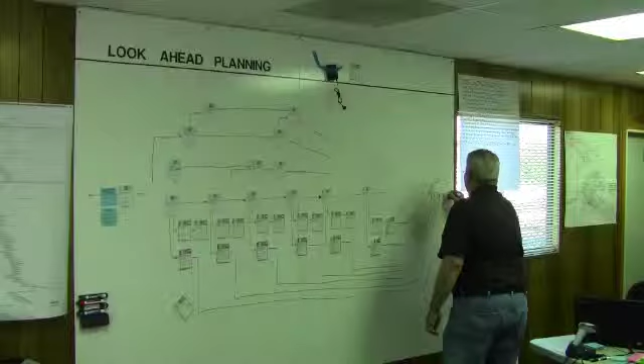That's something I was curious about, wanted to talk to you about. When you're putting this together, what Rick was talking about is, I look at it and immediately what I see is the forward pass, backward pass wheel. But are the links right, and what we play with in P6 and other schedules? Are you doing a simplified version without thinking about it, or are you truly a schedule guru who thought about the relationships, predecessors, successors, and all that? I am not scheduling people, I'm not, and I don't want to be.

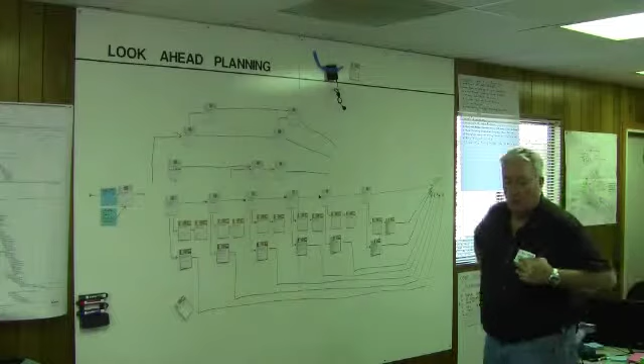I'm not saying it's a negative thing, but I'm trying to understand - are we speaking two different languages when we start to implement it, input it into P6? Are we doing a different step? Now we've got a translation issue between the two of us. That's why the word pickup was new vocabulary for me.

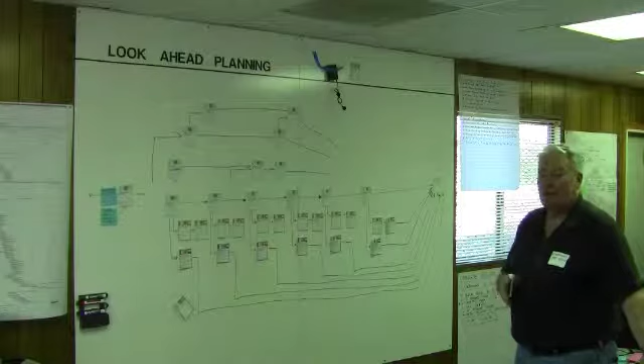Now that I understand it, I relate that to rattling steel. You rattle steel and put a couple of bolts in, but you don't finish - get the steel up, rattle a couple of bolts, then come back and true and finish. So rattling steel and pickup, same thing to me. But I would never come in here and say let's use rattling instead of pickup. That's my language, not your language. So I have to listen for what your language is and put your language in here, as opposed to mine.

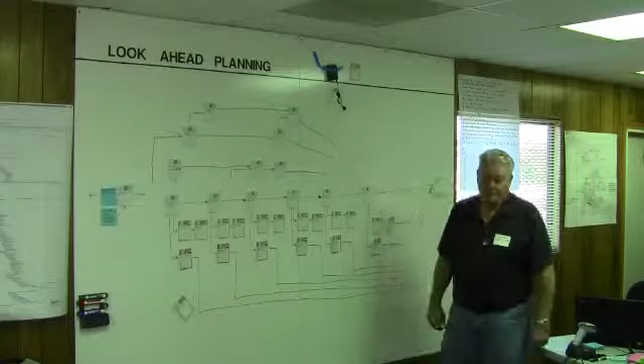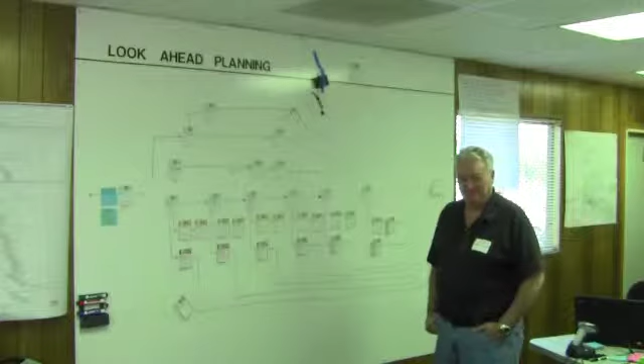They built 7 buildings, they're out there. How are you still changing work, what are you still figuring out? Well, this is panelization with the new manufacturer. If that's going to happen, then that's the critical path, and these guys have to figure out what they're receiving. There's holes being punched and cut out there that probably shouldn't have to be - that should have been done in the factory.

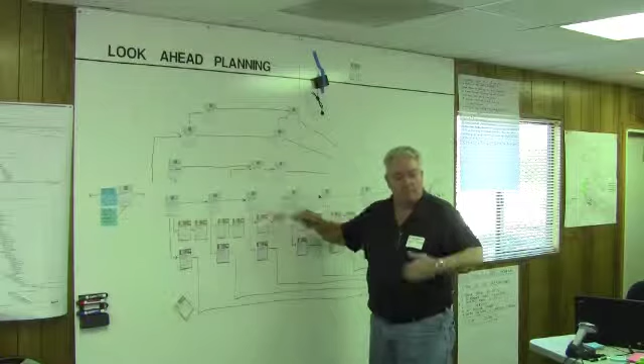They don't know these people yet, so they have to do things to make it work, because they're not getting what they expected. Not that they're getting something different from what was committed to, but we do a BIM model for a reason - to find out where the interferences are. Shouldn't those holes be pre-cut? That's the thing, but they're not.

I walked out, got lots of pictures. Did you put my notations on? What jumps out, give me two things. Number one, safety - those strips of metal, screws sticking straight up. If I'd stepped on one of those, bad news - they were all over the place out there. That's number one. Number two, I saw all of the handmade cuts with something - it looked just crap.

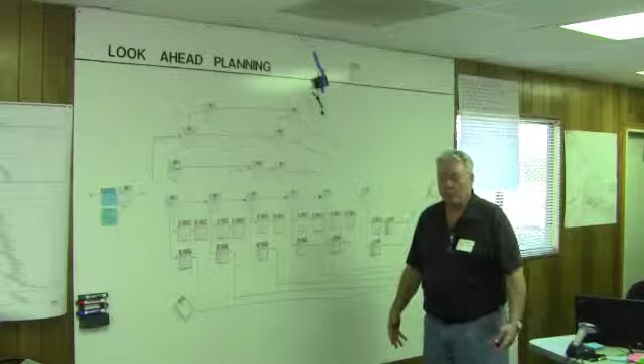I mean, again, that's what BIM is for. Yep, that's what BIM is for.

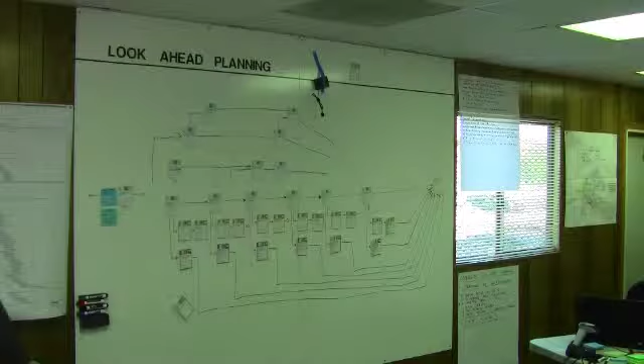Give me like a 3-word capture for this KPFF structural division. What's his problem? What is KPFF doing for us? What he did is on the back of house. Real simple, I'm just going to go like this.

Here, okay, we're building this one. I got a little walkway here, and I got an outbuilding. He gave us this one, and he did that. He's working his way up like this, and then all of a sudden he goes, here, I need all this done, approved, right? Approved before I can give you this. So all I can do is go vertical, I'm stopped, because I can't make my walkway and connect the two. You see what I mean? Yeah, come across.

So I've got rooms, I've got trusses, I have no back of house. Some of that, just in the overall BIM process, pre-planning - a lot of work goes in, I'm not making an excuse for it, I just know a lot of work goes into them. But if I've got a slab and you want guest rooms and you put something in here in production, go.

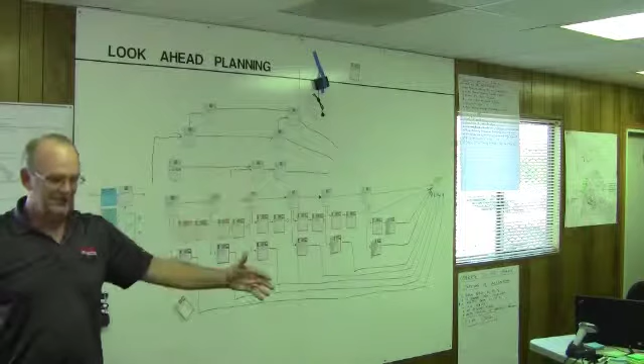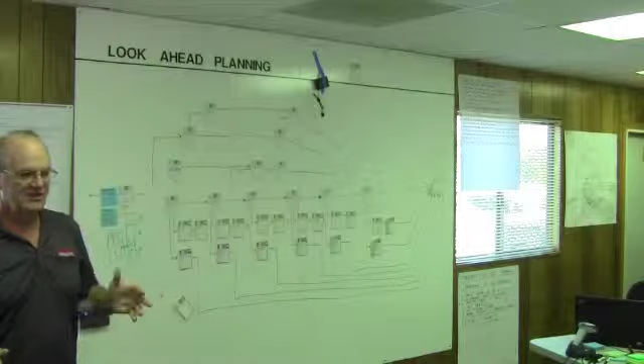First floor. A little more on materials, we've learned in our lessons, we need, because of the assembly of it, a period of time where there's a lot of work, a lot of production that can be done prior to assembly. That's a lesson learned.

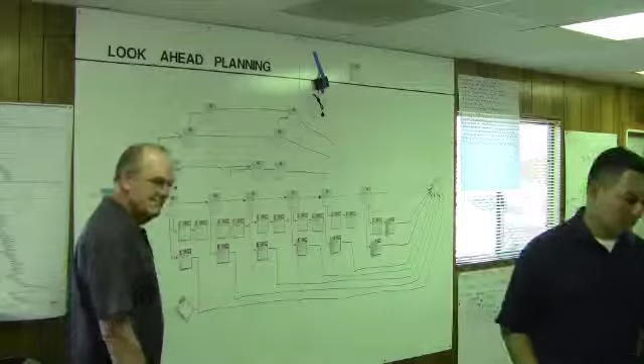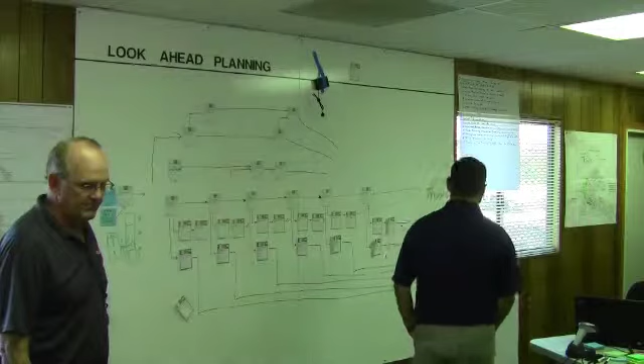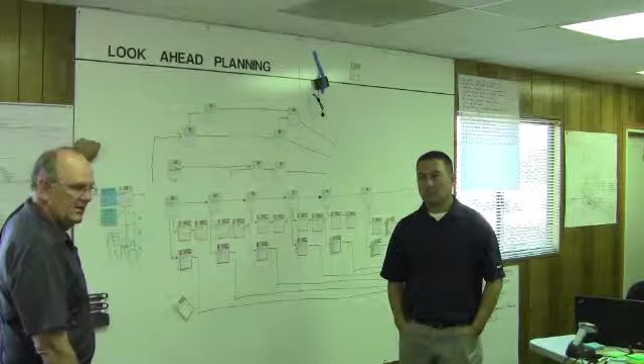Give me like a three-word summary, I want to have a conversation with them on it. They have a legend issue, and now is it sequencing? Right now it's like submittal sequencing. We need the submittal approval on back of house. But does that mean we need to give him a sequence in the future so he can work to, or is he late on something? If I have a conversation with him and want to bang something over his head, the legend issue is something I've got. How can we better avoid this going forward? Is there a lesson learned for me to share with him, or is it?

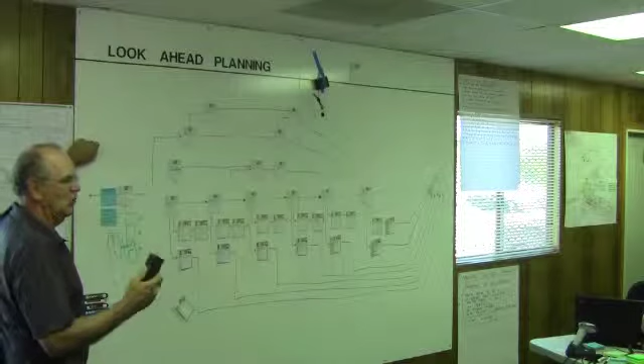What Kevin feels is to stop. He's got his consultant KPFF, and he's saying, okay, if I could help with KPFF, I just need to know what that is, and if we can stop it in the future. What it is, he needs BIM drawings to approve. Jonathan's here. Jonathan never—and I'm out of that circle, other than Jonathan. Jonathan's right here, he's in the circle with BIM drawings.

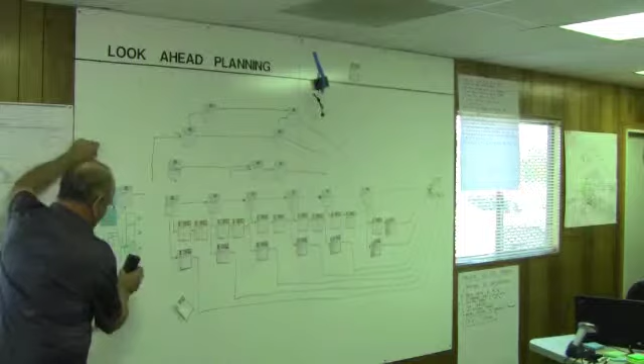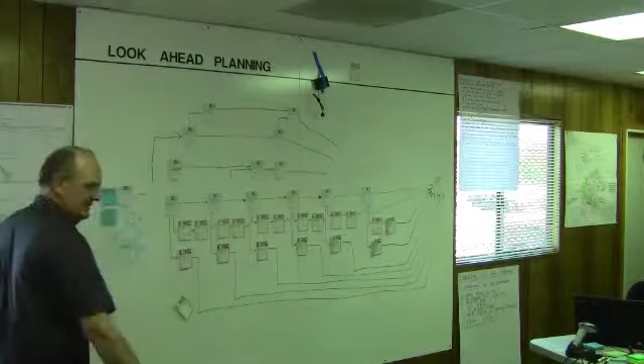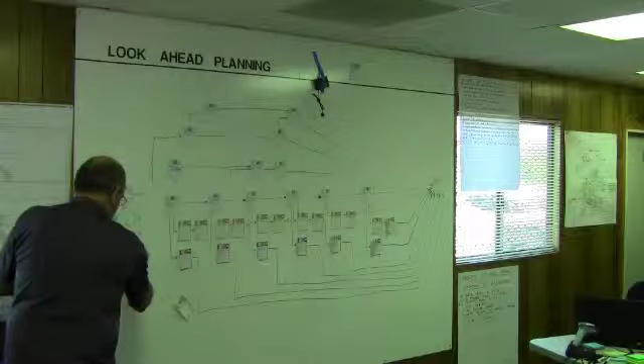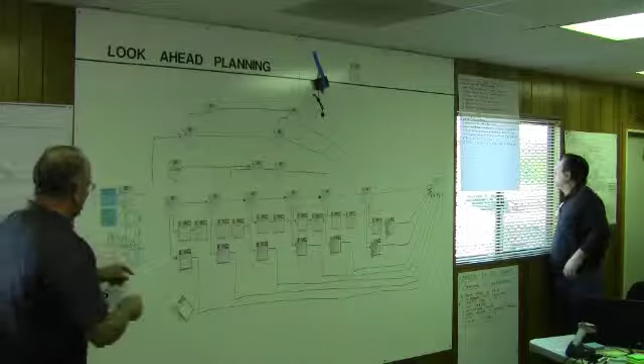We were told from in the room here that first floor, level 1, was level 1. Okay? Now KPFF is saying today, no, level 1, I can't have that until you give me this. That's the clincher—you give them all 3 floors to do this, you stop BIM here.

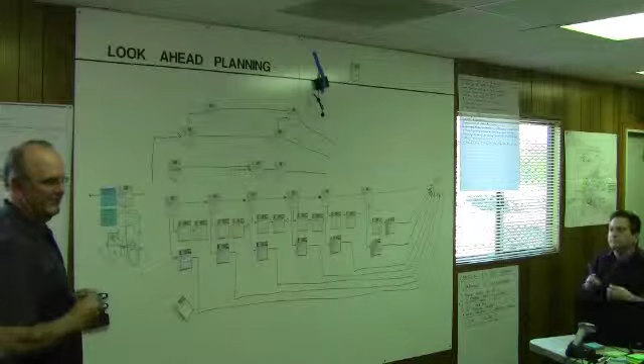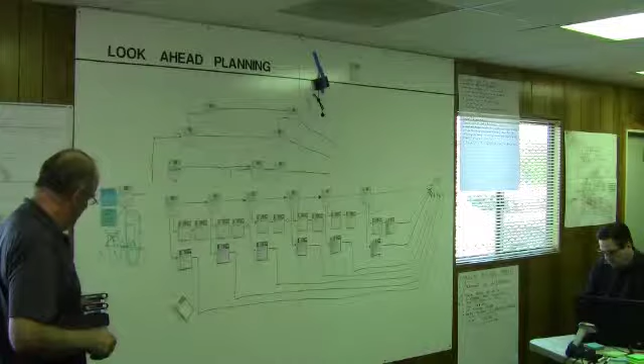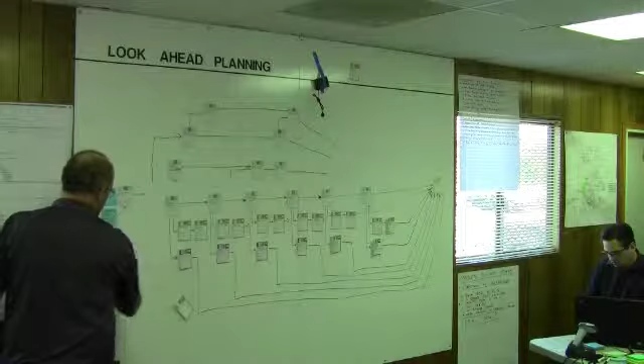But for me, well, what I want to do is just, if there's—they want to look at the submittal all at one time. They want to see all the connection details. That's the reason why, for whatever reason, necessarily all the connection. I'm sure she's got a reason why. But I think if we just talk to her and say, look, production-wise that doesn't work, so can you look at this so we can adjust.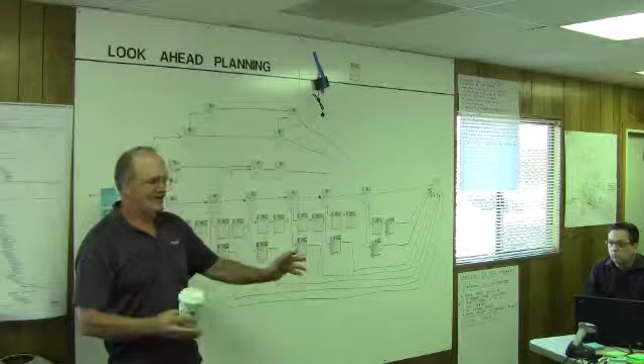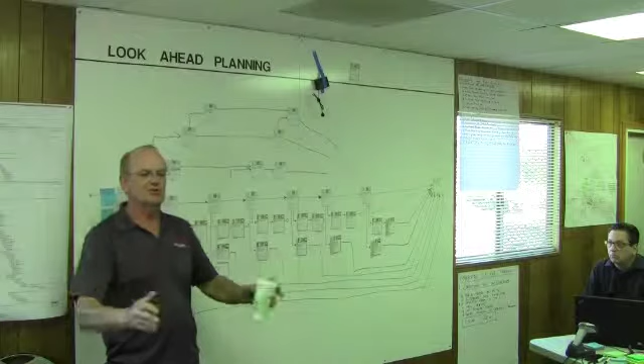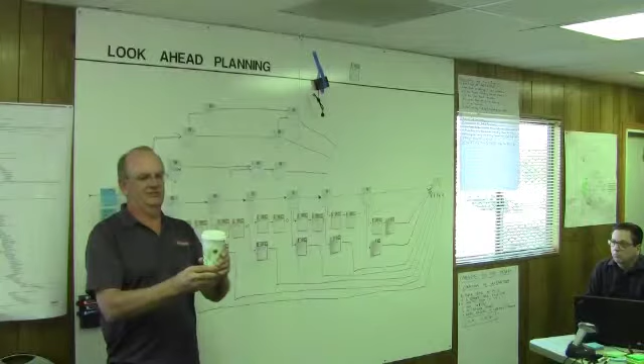Just throwing this out, let me offer this, okay? When they're doing the pre-planning, it kind of hit me when they were talking to the lean team, because Dave was out here with them, involved as an architect in the lean program, pre-planning prior to construction, where a lot of it is done up front. It may be that KPFF—and I don't want to make any new rules up—but in pre-planning it's, okay, if I want to build this building structural, how do I need to receive my submittals, to be the most efficient for that field? Can they give me all of level 1, 2, 3? No, we have limitations on how that can be approved moving forward.

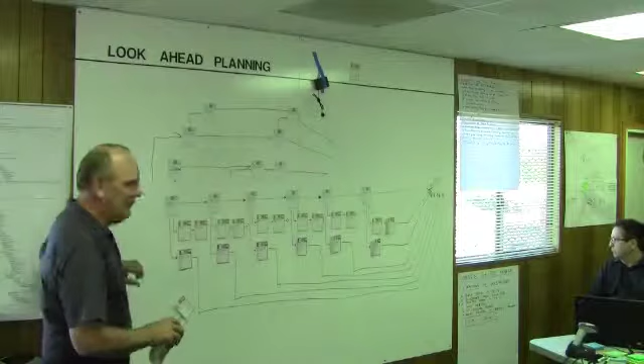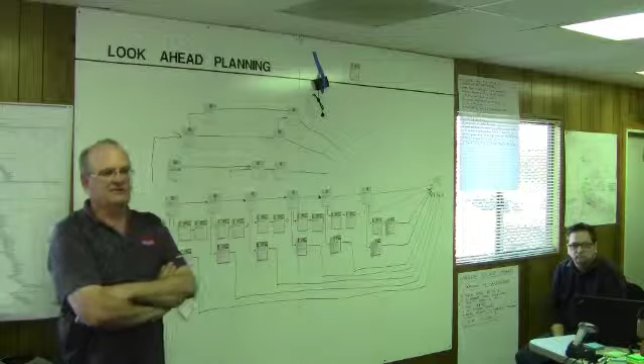Maybe it's—so it's a pre-planned thing that could have been eliminated, but now we just have to figure out how to move forward. Now we gotta get that. So what I'm calling is submittal sequencing. We probably need to have a conversation about what do you need? Just like we had talked about, give me a submittal schedule so we can get a heads up, or basically MDR get a heads up on what. This constructability—they have their means and methods they have to go through their submittal check process. I'm not the expert, they are. I mean, they can pull that out of the weeds.

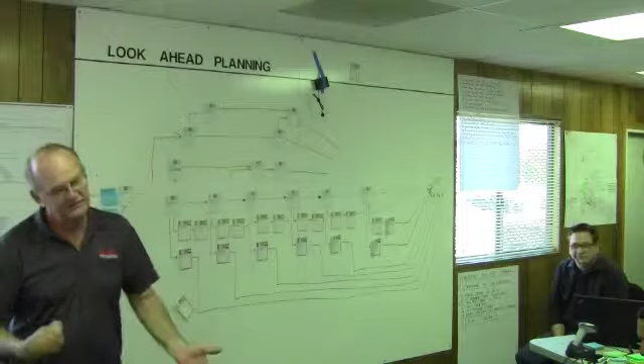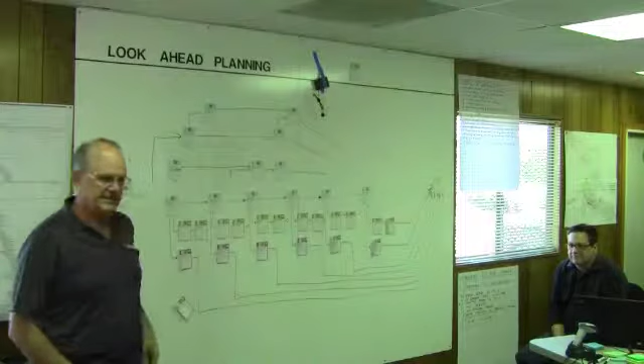Well, I mean, because obviously we got the signing. I just don't want design or anything to hold us up.

I don't think so, it's probably a conversation with them, there's a method to the madness. She said the stairwells can't be reviewed in floors, so it would be a system, but she didn't know until she got done reviewing the first floor. That's when I got on the phone with her and she brought it to my attention.

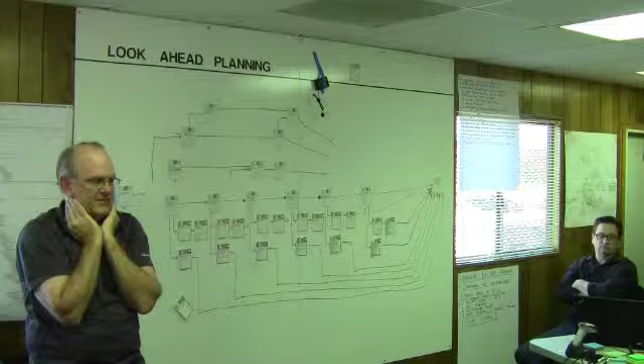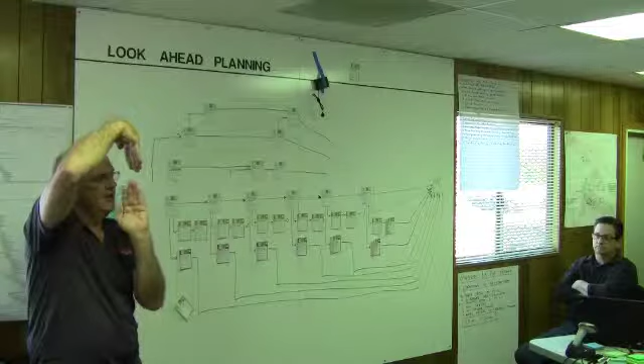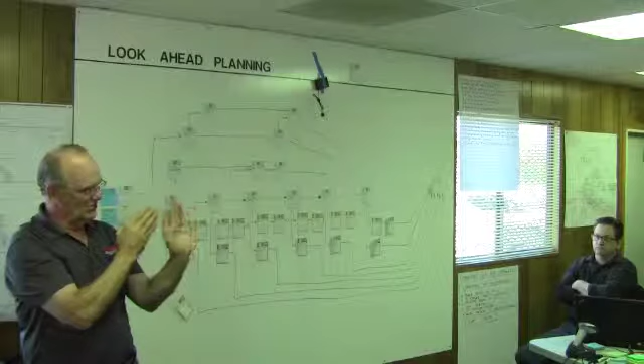She might be in-house trying to figure something out, but like John said, you just gotta weed through there and ask her what it is. Does it stop all the way, does it stop my center core, does it stop, is it one connection holding up?

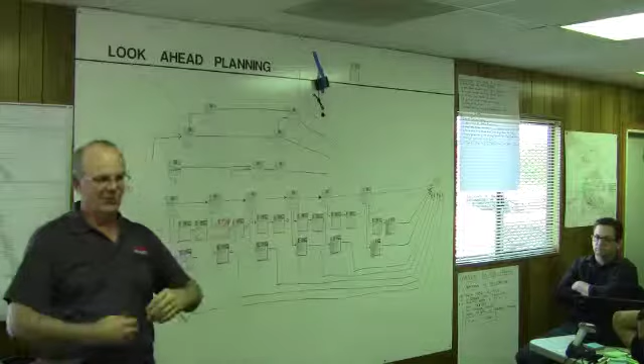We don't know, we're speculating. All right, that sounds like a good conversation.

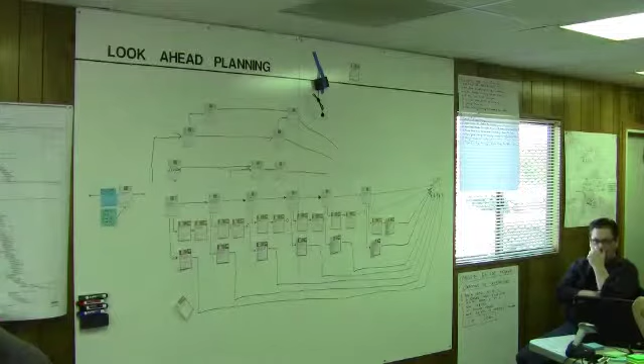I kind of gave it this format there, just in a nutshell, what we did.

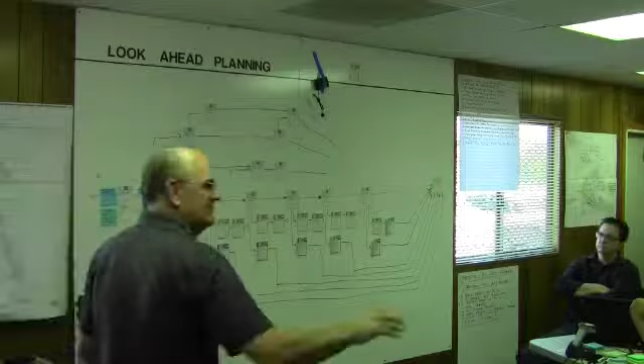We took our information from here, we brought Rockdale in, sat his butt down, and he was all ears. Did the best I could to explain to him what we had going on, so he's had a first lesson.

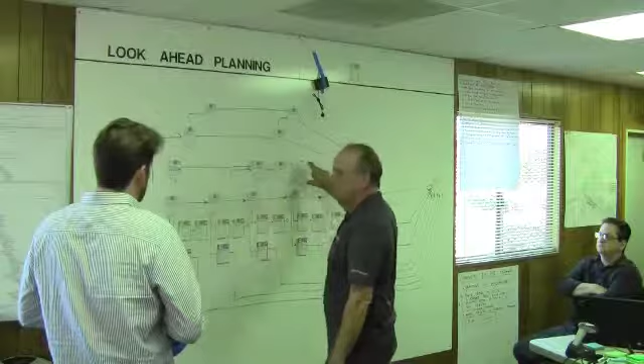We need to be able to put the information into the next note for the second floor. We got him in here, we gave him this critical path, we gave him the layout and the input of the joist up here. The back of house issues, we need to work through this right now.

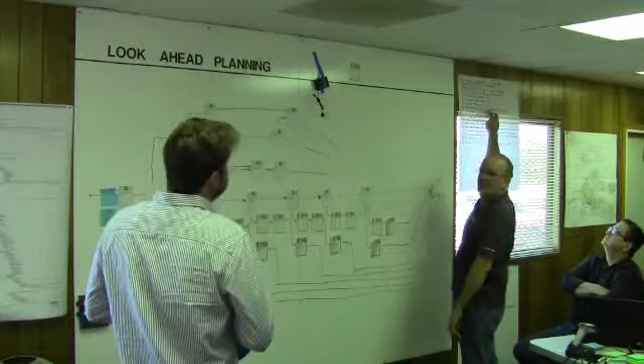And then the metal decking, the corridors. I gave him complete second floor framing, my conditions of approval. This is spelled out of what I see done as 100%. We had a conversation, the first day was first floor, level 1, I need to have done.

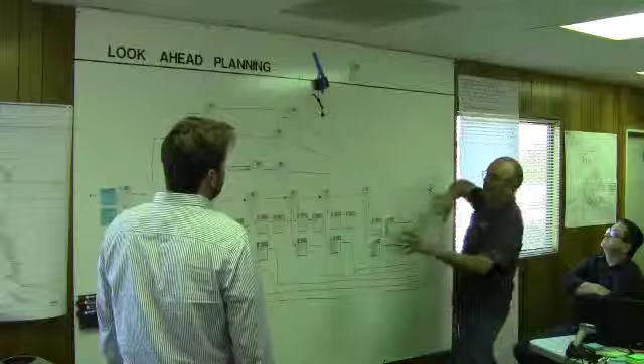That includes outbuildings and guest rooms, all of one, because we can't go anywhere without it. This is broken down a little bit further to include those outbuildings. Anyways, for you moving forward, I don't have durations.

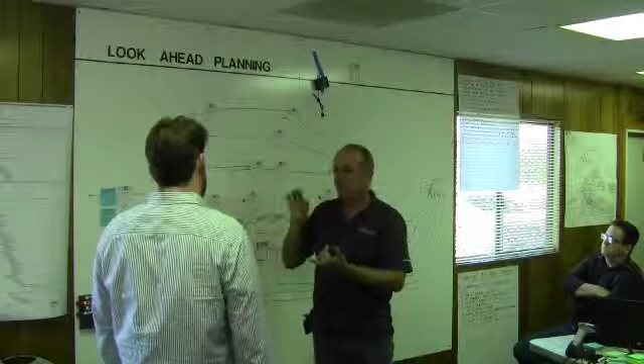For the sticky notes that you need to put in, these are in there already. We reinstalled them, we changed the dates. There might be additional ones you need to add, let me know. But we need durations and procurement. We don't know when the delivery dates are.

We're finding we need 5, 6 rooms out front before we need those men here to do it. We don't have a second floor delivery or back house delivery. And that's the Reader's Digest version.

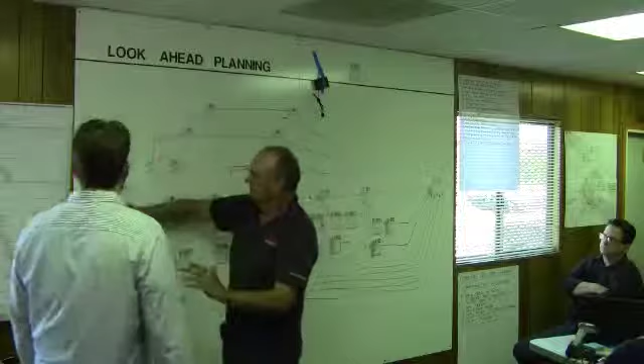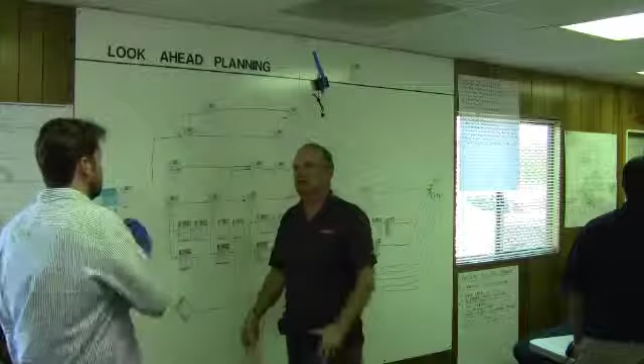So right here, your input this morning, we started here, left walls, rescheduled, but it has no dates to put on. It's all based off of SWS's input of procurement, being able to deliver in production, and in tune with that would be manpower. That gives us a number of days to install that.

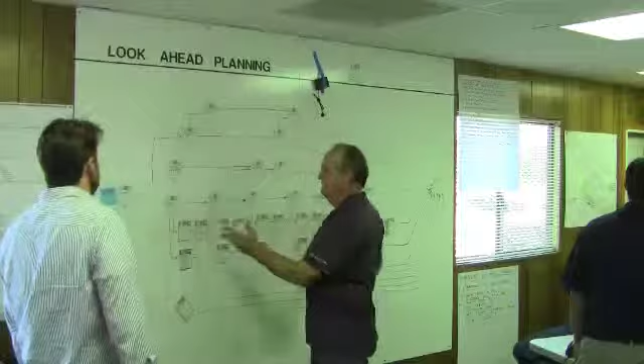And then we can finish this schedule. I apologize, this is my fault, I assumed someone else was going to be here and they weren't here. There's the punctuality thing, and then the second biggest lesson learned was...

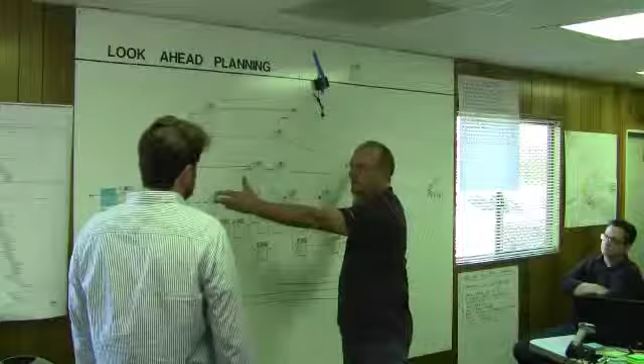Enter the notes, because the guys pick them up here, we're into our planning session right away. We're into it, we don't have to spend 2.5 hours getting to this. So we did okay, but...

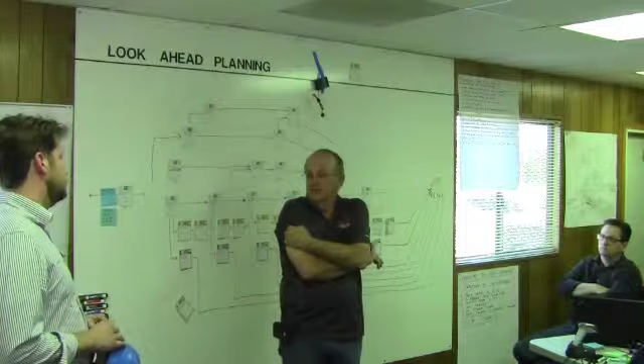Right, because that has to do with the BIM portion of it - getting all the information, shop drawings in, approved, and then production. I'm assuming you're making second floor guest rooms now, are you still going vertical? Yeah, we're getting close to fabricating second floor guest rooms.

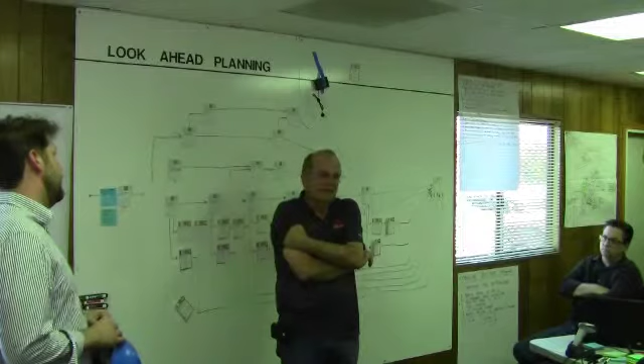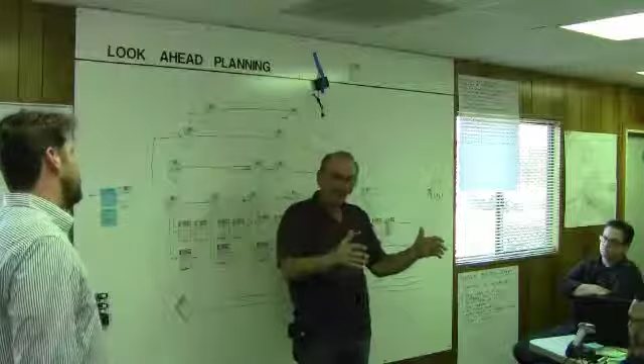We're finishing the back of the house. So you're going all 3 floors? We started without the full approval, so we can get some in there. What she's wanting is that we needed to finish that whole corridor area so you could run it - stairwell, elevator, boiler room, maid's room, stairway.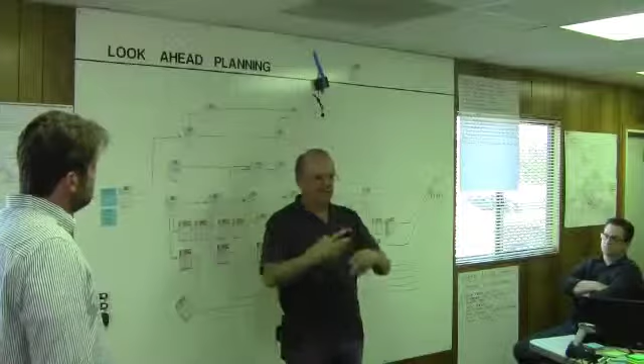Right at the back of the house. So he's working on it - we were working on it. Okay, so we just need to carry that forward to make sure we get the structural issue taken care of, whatever that connection is, so we can finish it up and move on up to site work.

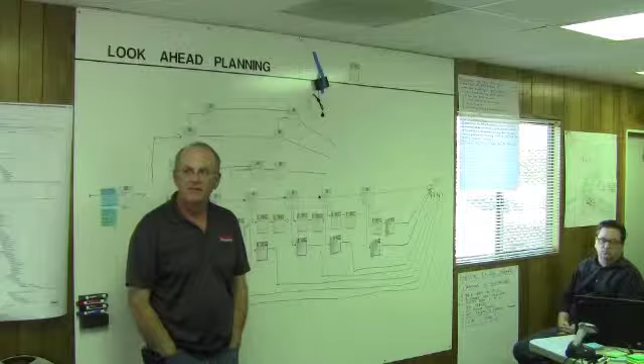That's not the way your structural engineer wants it? Right, so that's what we kind of need to work through, without moving our second floor shop drawing dates back at all, but expediting the back of the house.

Well, as long as you're already framing or building the back of house on the first floor, that won't impact him, so we really won't lose any time on this, on the plans and submittals.

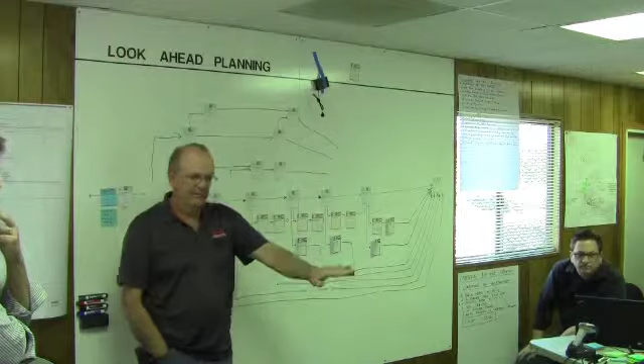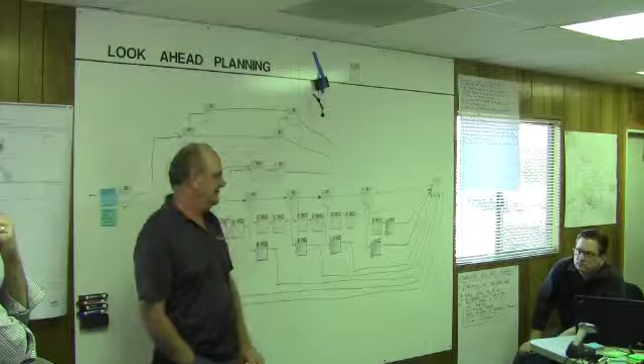I need you to go forward, I need to find out what she's doing. Right, because once we get production, everything is in order, it's coming, we're all working on it. But that's the showstopper right there - because that doesn't let me complete second floor guest rooms, it doesn't let me get there.

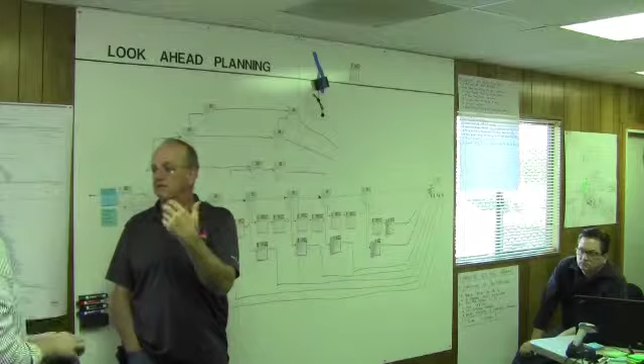And then we've got the joist - is that for first floor and second floor, or just first? Just second floor, but it goes on top of first. Correct, yeah, so we have to get level 3.

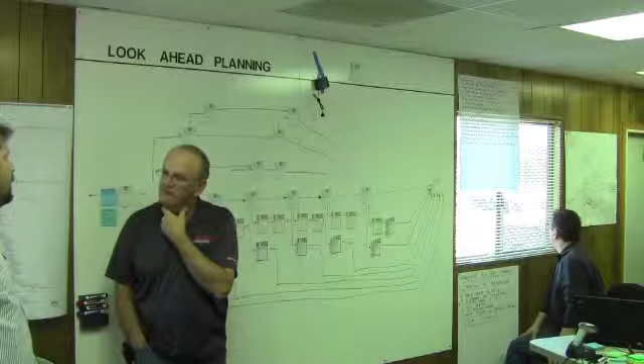Is that the walkway? Yeah, okay, there's probably some material - I just want to make sure we get the ledger material on there, so we've got walkways.

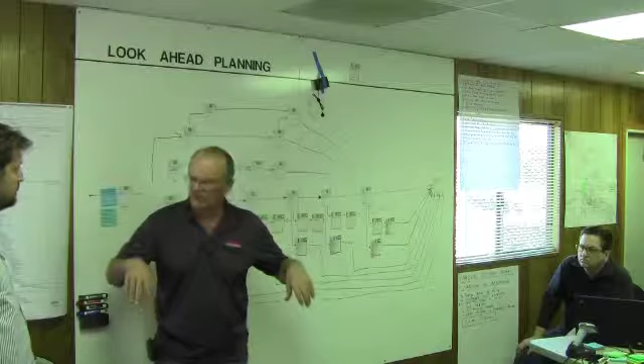And then, is the railing attachment going on top of the concrete, or has that changed and it's down on the deck? The attachment for the balcony, or for the pole, or for both?

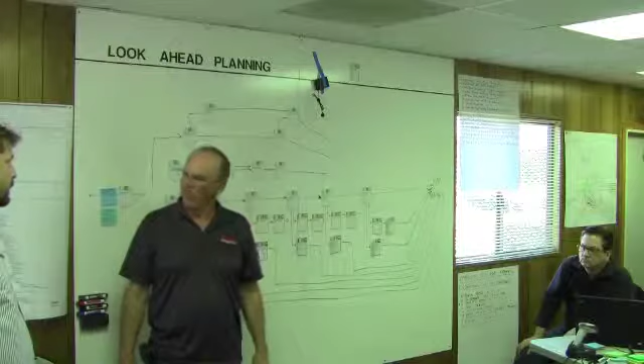I'll have to double check, I don't remember, they got some detail on the attachment. It's like you're in the middle of framing and you stop, you've got to stop for concrete, stop. I'll make a note of that too.

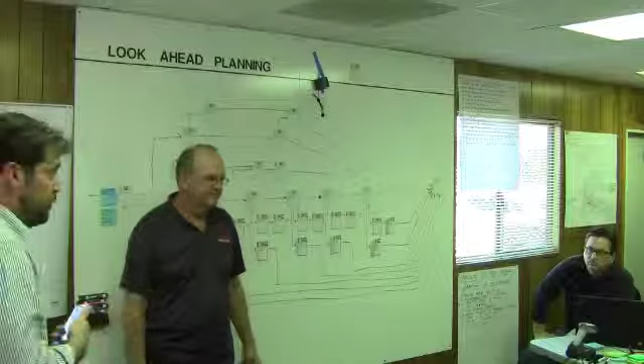What about decking? It's all at my shop, I just need to ship it out here. I was going to ship it before we had anybody on site, but to get a forklift out here is going to cost me more than it would to truck it down here. But it's all in my yard.

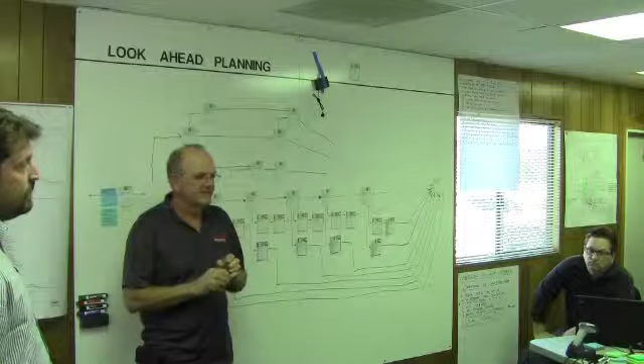For the entire building, you don't need dates and durations. Yeah, we just need to update that and work that out, Jonathan, between you and the planning side.

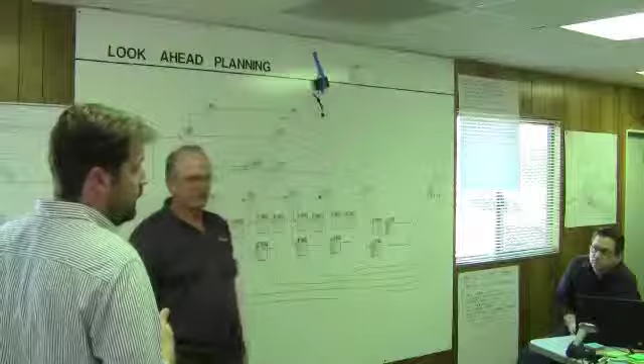Yeah, let me take some pictures. How long are you going to be here for? I can be here as long as you guys need. Well, we're going to break for lunch and we'll be back. I was going to go out to Rafi, make sure he's set up.

Joyce, I brought some clips. Part of the reason I was late, I had to pick up some joist clips. Yeah, I just want to sit down with you after, when we're done, before we go. I understand, yeah, let's put this on.